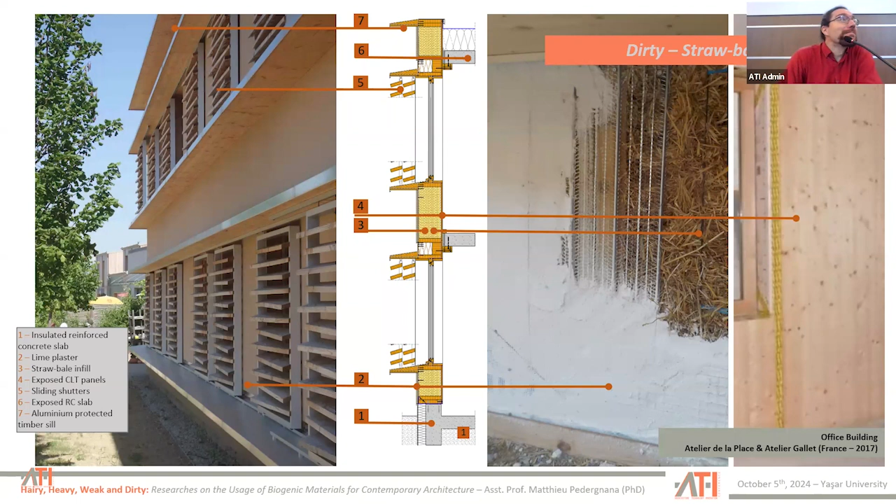You need to think about it. How we face the fact, not what they are, but how we think about it, how we get used to thinking about it. Because those materials that have been used for hundreds, thousands of years, have been forgotten since not a long time actually - not a long time, 70 years maximum, but they are everywhere.

So what do we do, or what do I do? How do I research? First, I don't do it alone.

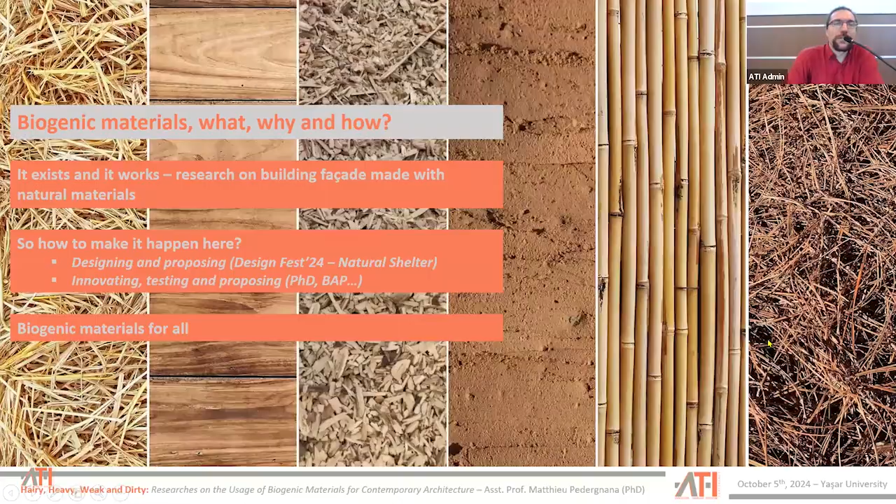So that's what I want to tell - how do we make it happen? By not working alone, and working with students, since I'm at university. This is not my work, this is students' work. This was during the design festival this year.

Yes, at the beginning we introduced - I was again not alone, there were other instructors here, some of them knew about those materials, some of them didn't, but it doesn't matter. We introduced the materials, we introduced the possibility. How did we? By making students take those materials in their hand, get dirty, cut timber, mix mud and water and straw, and understand. And then they were doing it, and they did it really good.

You can see this model down in the exhibition of students' work. You can touch it, it's strong. Yeah, it cracked - of course this was not a research and final material, this was experimental, to experiment possibilities. And that was really good. I will show you after a slide of something we have done during the summer, based on students' experiments during the design festival.

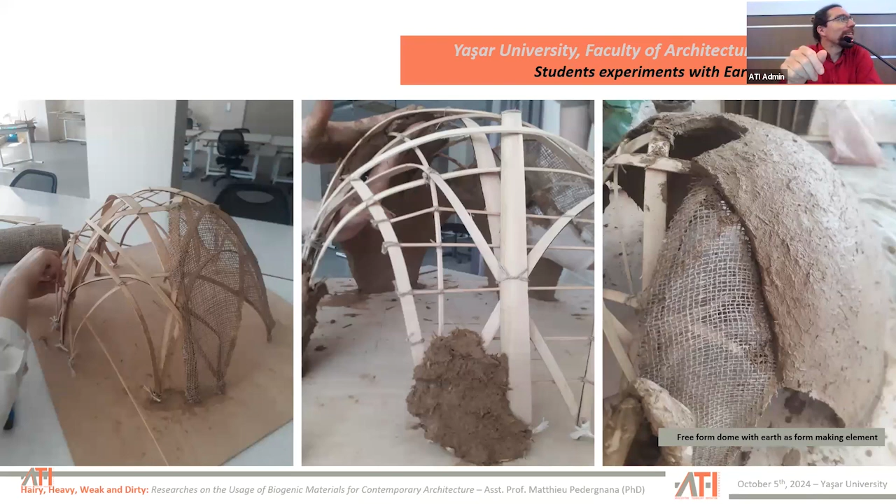Another thing they did during the design fest is this type of wall, rammed earth wall blocks, and how to maintain it by designing some kind of post-tension structure. So you put the block on top of each other - there is no mortar, there is no thing - and then you just compress it. And the students worked on it, they did it by themselves. They didn't invent it, there's nothing to invent, that's a technique that is already known. But they did design it in a way or another, and that's good to think about.

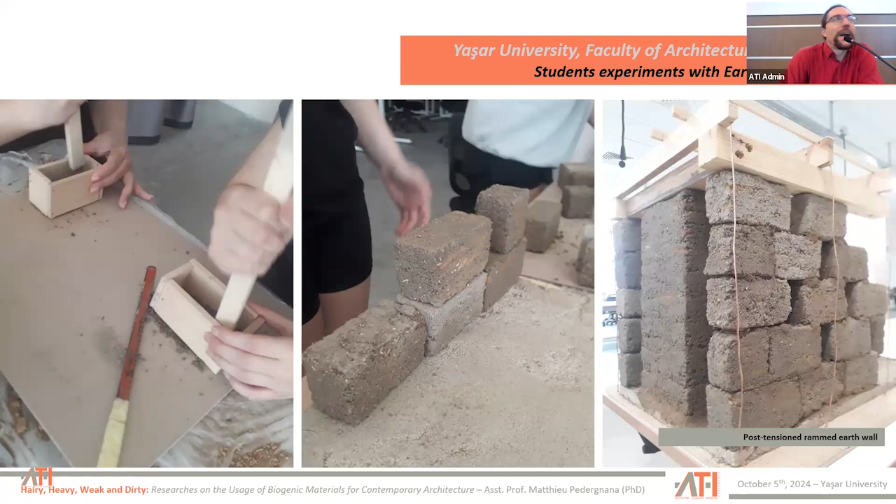Or using different techniques to build. Earth doesn't have to be load-bearing, it can be used as insulation material, just as a cladding material. And there are techniques that exist to build and even design a building, make a vault without any formwork. And it's a traditional technique that can be used, and that's done. They just learned about it, retried it, and made it very well.

There is no formwork to do this vault. Why am I insisting there is no formwork? Because formwork in construction is a high amount of waste, timber waste most of the time, especially special formwork that gives a special shape. If it's straight, you can reuse it; if you have a special shape, you can't. And there are countries where there is no timber. So techniques that prevent the usage of timber are already good to promote.

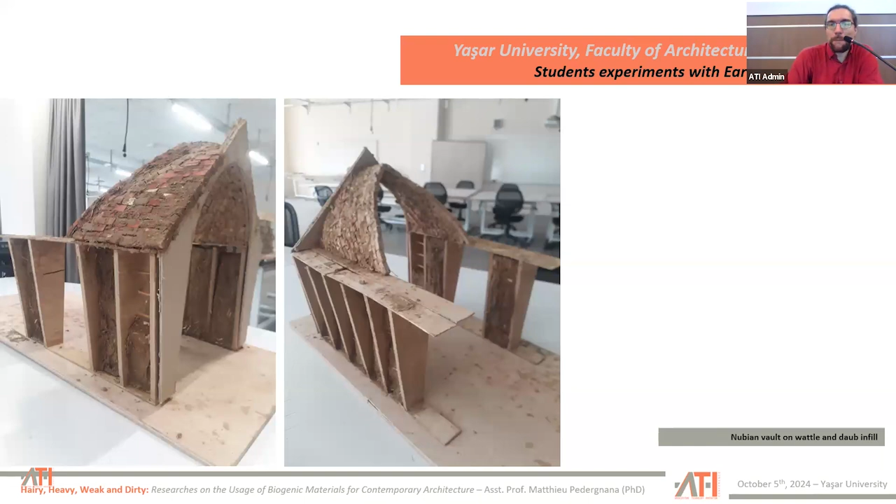This is in front of you. I had a picture, but I thought that you could come and touch it at the end.

This model, again, is done with students, a group of students that came to me after the Kahramanmaraş earthquake asking, Hocam, what can we do? I had an idea, but then we developed it together. That was not my work, that was their work. If it had been other students, it would be different. If it had been built in another place, this model would be different.

The idea is just to use local material as an insulation material, local earth as a binding element between all those fibers, and covering with local earth plaster. It's a shelter, not something supposed to stay for 50 years. It's something supposed to stand for 1, 2, 3, 5 years, let's say. So there is no problem using earthen materials that are weak and not water resistant. On the opposite, it is good to use those materials.

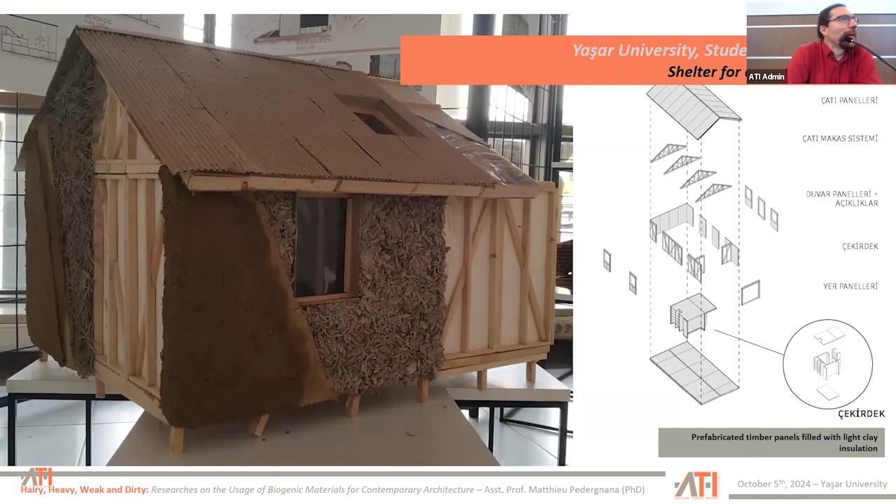After 5 years, let's put everything back to the ground. Then we have really good compost to transform the place where there was a building into a field again, instead of having hundreds of square meters covered with concrete and then steel bungalows, not comfortable because not insulated or not properly insulated, very small and not designed for large families. That's what we were working on.

But it's about using local material, because transporting these kinds of materials over hundreds of kilometers doesn't work. Using local material and local workmanship for people that just don't have a job anymore works better. So that's all about it.

When you start to think about this type of material, it's not only the materials by themselves, which are natural and good for the environment, but if you think local, it means the job, the production system is local too. You have to work with people living there. Nothing is produced hundreds of kilometers away. Everything is produced on the place, with the material on the place.

We were aware that there were no more production facilities, and there would most probably be a shortage of timber, shortage of tools, and so on. So the idea was to prefabricate the panels without the insulation material. All the timber panels were ready, transported. Then the craftsmanship needed didn't require experienced craftsmen or experienced workers, materials that can be found anywhere could be used directly.

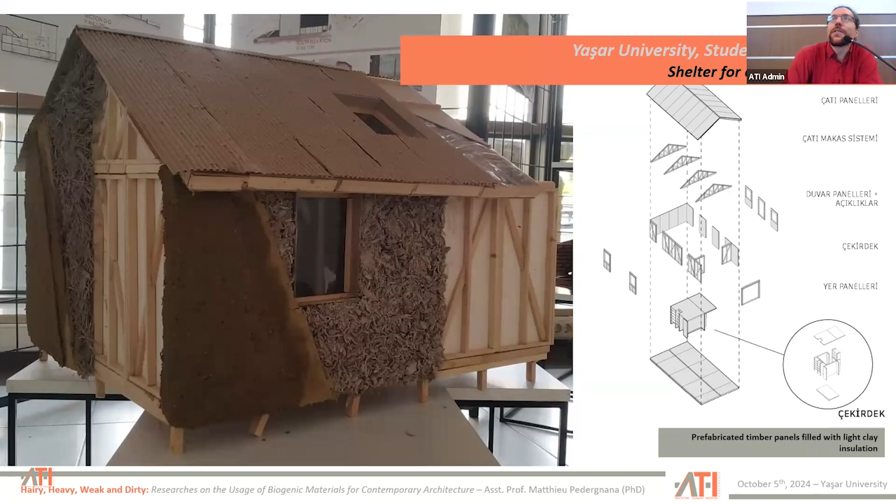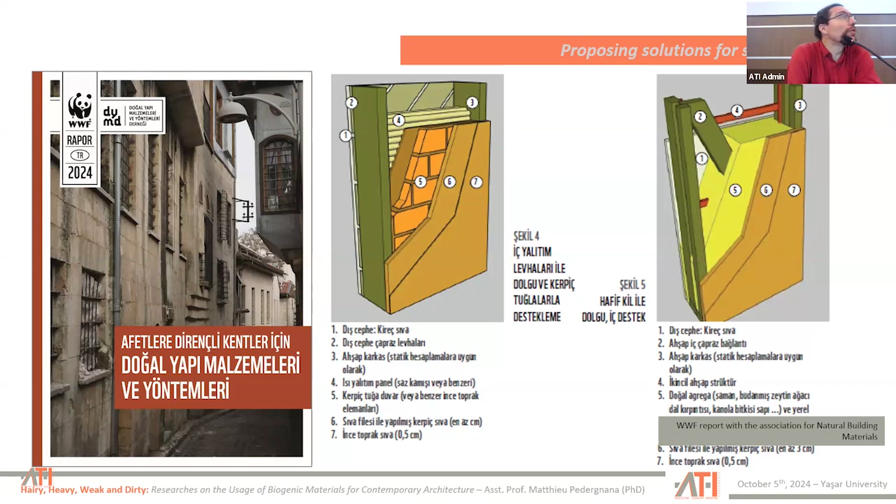And then we continued this work with the association and created a booklet to propose solutions for reconstruction of affected areas by the earthquake or any other natural hazard, by proposing different construction systems. Not out of the blue - this is not new, there is nothing new. This is just trying to learn from what is existing, what has been tested somewhere else, and adapt it to the local material, to the local craft, to the local knowledge.

But for this, we need to test, to research, to find out the properties, especially if it is not to make a shelter that will last 5 years, but to make a building that will last 50 years or more. We need to make sure that those materials have good properties.

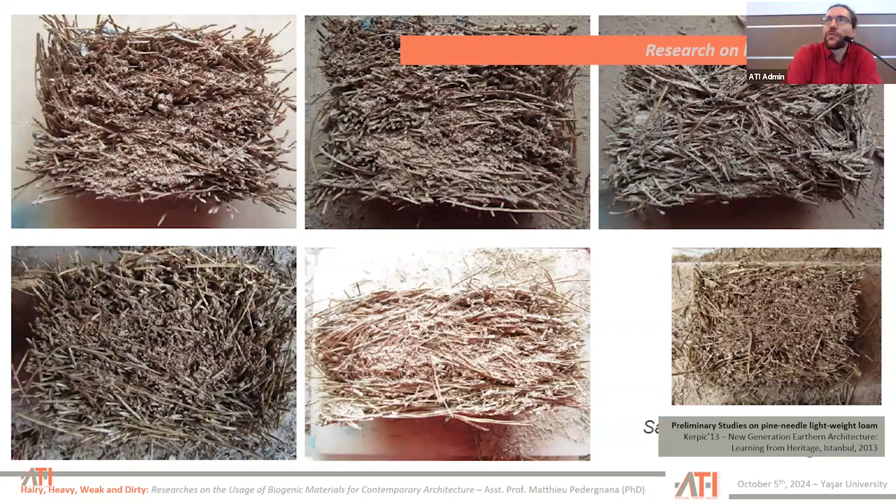And this starts back when I was working with my wife on a master's thesis project. She had a research project on this light clay insulation. For 2012, 2013, we were working on it, and she produced hundreds of samples and tested them for different properties. So here you can see some of the tests that have been done.

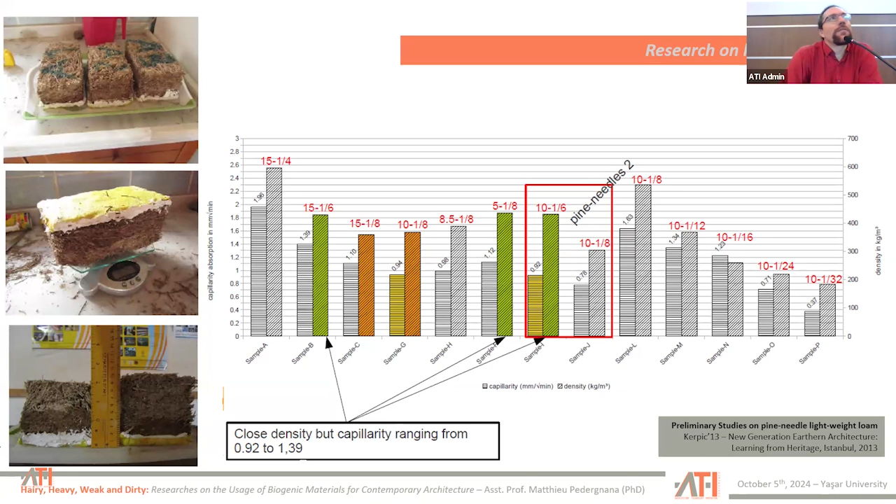She worked with pine needles because that was the local material easily available at ODTÜ. I don't know if you know ODTÜ in Ankara, but it is in the middle of a pine forest, so there are pine needles everywhere. That was just testing how it works, and compared to materials already tested, like straw, the properties were totally similar. So therefore, it meant that pine needles could be used.

Then I was working on my own research, but as soon as I could start again, now I'm coordinating a research project here at the university, again on the same type of material. You can see some of the samples we started to produce with students here. We use 8 different types of fibers to produce different panels that we will test for their insulation properties, their water resistance, their humidity transfer resistance, and so on, to see if they are appropriate for construction.

That needs to be tested because there are so many parameters, and it takes a lot of research that very few in the world work on. There is no lab here in Turkey working on this. There is a lab on reinforced concrete in every other university, but there is no lab in Turkey dealing with natural material at all.

We have to beg a spot in the middle of the concrete industry to be able to work, and their machines and production lines are not adapted to those materials. So the research is not efficient, because everything is turned in one direction, and we need to rethink how to do it.

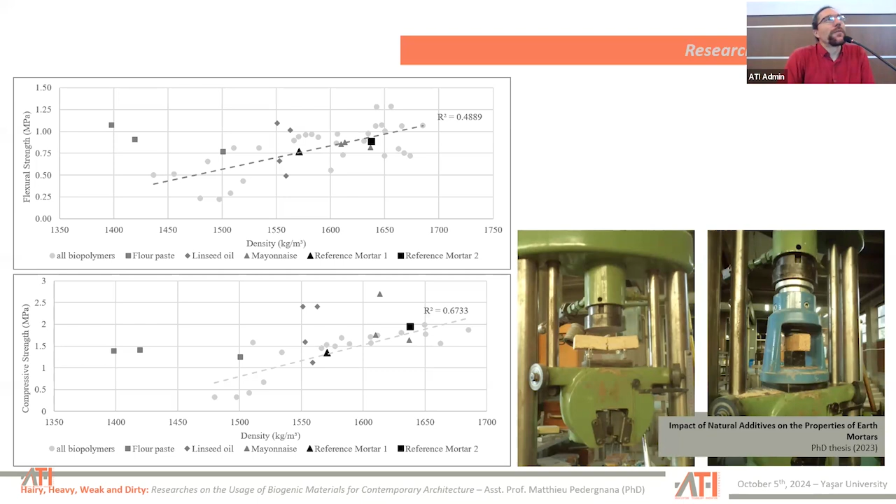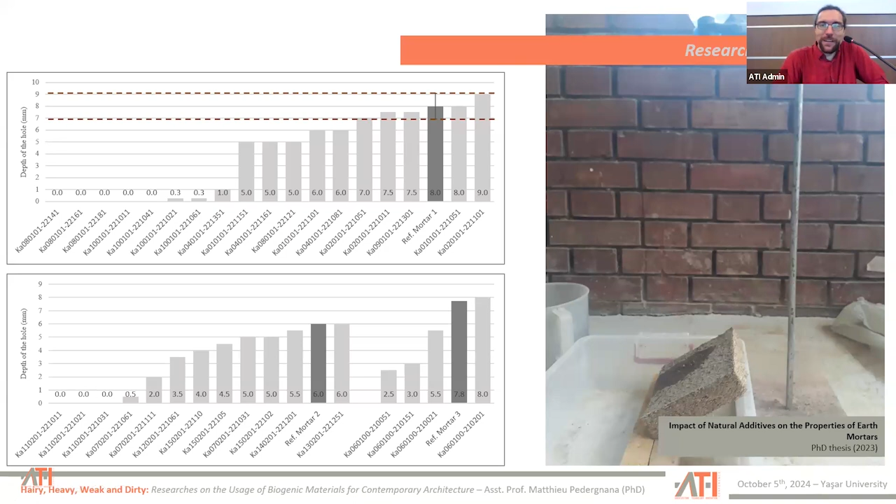So I started to work on it, doing mechanical resistance tests, water resistance tests, and many other things—you see the numbers here, these are the sample numbers. You can imagine how many combinations I tried. This is the conclusion of my PhD.

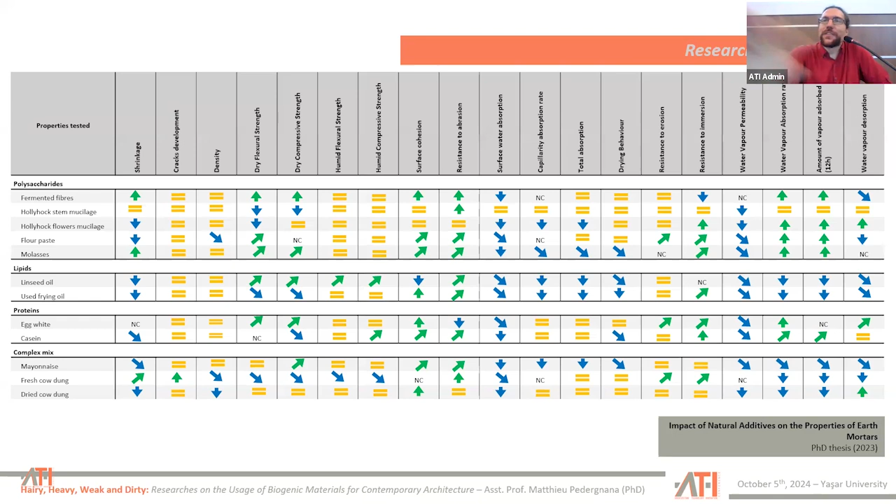But this is only the conclusion on the biopolymer additives that have been put in. There's nothing about the amount of fibers, the type of fibers, the amount of sand, the type of sand, the type of clay. It's just the biopolymers and the different tests, showing good results. But whatever you do, at least among those I tested, there's no biopolymer that is a complete solution.

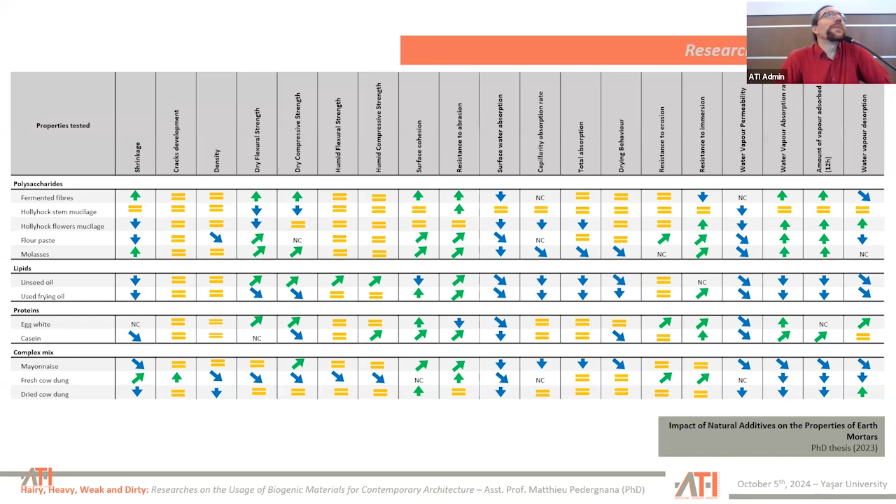It depends what you want to do with your plaster—if you want it more water resistant, more strength, or more humidity transfer and so on. It depends. So you need to know what you want to use it for.

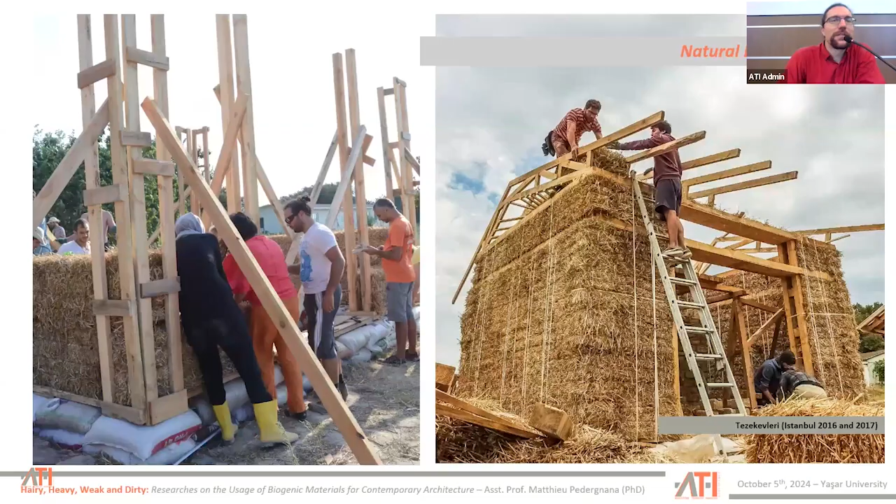So then, yes, this is the research part. And as I showed at the beginning, it's good to introduce these materials to everyone, to experiment and try, and then to apply it. So these are workshops, real workshops with students, some architects, and some people who wanted to build their own houses—these are experiments too.

This building is a straw bale load-bearing house of 20 square meters built in 10 days. This is its state after 10 days, built only by unexperienced workers—people who didn't even know how to cut a piece of timber. But they did everything from the foundation to the roof in 10 days at the workshop. Straw bale was fast.

We did the same with this type of material. It was a bit slower, but still, they did the entire frame.

What I want to show through this is that we need testing. We made a lot of mistakes, but those mistakes were used to improve the techniques, to avoid repeating them, and especially to introduce people to these different materials and how they work. Also, everyone could be educated to do this—if people with no education in manual labor can do this kind of work, any worker in the building industry could shift their skills to make it much faster, much more efficient, and better quality.

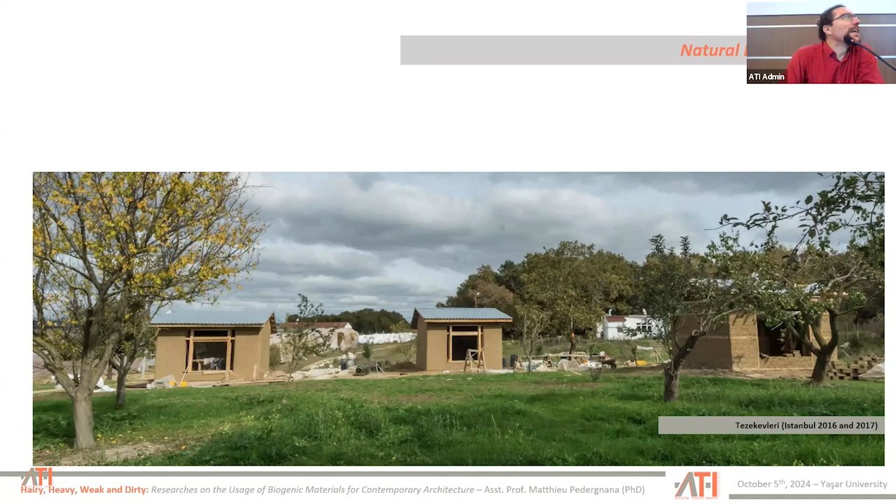That was the state of these 3 small houses after one summer of workshop with students and volunteers coming to help. Unfortunately, our funding finished, so the third one you can see hidden here has never been finished. The other two were finished and used for people to live in, one finished the year after. That's how it is to work with workshop and experiment—it doesn't always lead to what we want.

Working with students, introducing them to different and alternative techniques. During 2 years we've been doing workshops organized by ISTEC, the architecture department, inviting students from all over Turkey to build with us. A lot of different things were done and tested, like building an oven out of earth because they wanted a summer kitchen on the place.

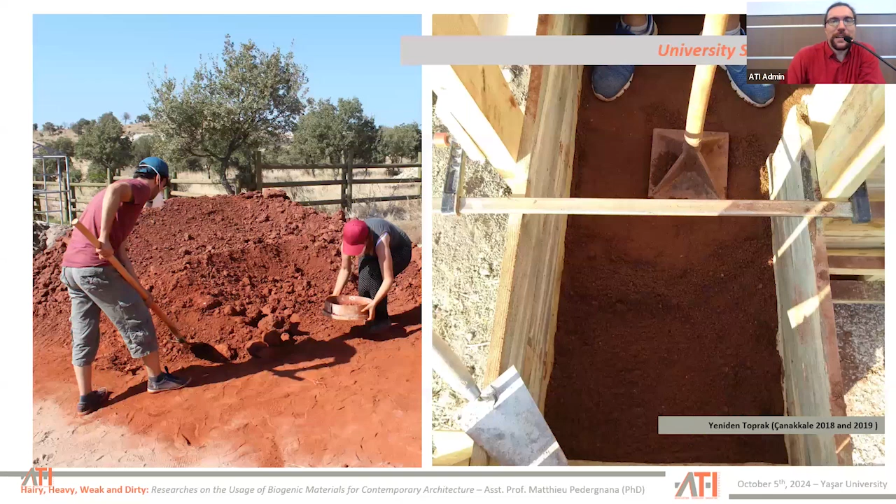So we started with an oven out of earth—different techniques. Then students made a rammed earth wall. What was important is not the final part of the process, it's these two pictures: students doing all the work, meaning we had a pile of earth at the beginning that needed to be tested to find the right combination between earth and sand.

It needed to be sieved and broken into dust so it can be used properly. They did it, then had to build a formwork, and then build the wall. Students did all this during the workshop, so they understood that a finished wall isn't just about drawing it—there's a process behind it, a process of building. Of course, I don't have a picture of the finished wall, but half of it collapsed at the end.

No problem, that's part of the experiment. That's the reason why we do workshops—it doesn't have to be finished and perfect at the end. That's not the point. The point is the process behind it, and learning from the mistakes, learning from what was wrong.

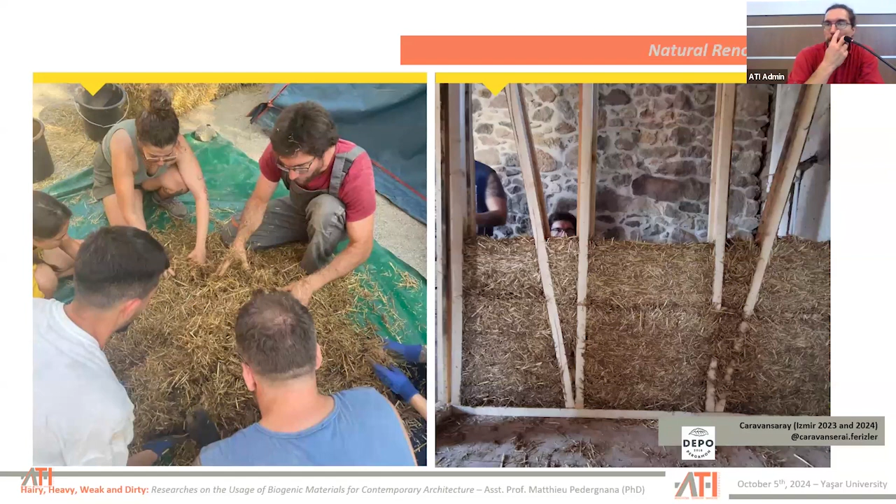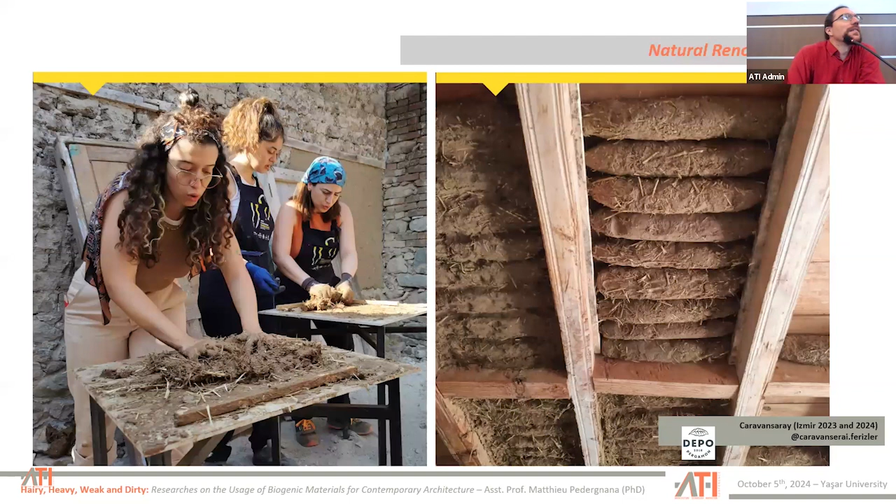Another workshop, this time in Bergama. Over there we worked on renovation of an existing building, applying the same type of techniques. Again, architecture students staying for months, learning and building everything by themselves, being introduced to materials and new techniques that have never been tried here, at least in Turkey, to find other solutions.

So this is making ceilings out of earth and fibers. Why? Because the ceiling was made only with a board, so to create heat and sound insulation in between, we needed to find a technique. This was a technique available, and this was a test—testing, seeing what works, how to understand it.

I'm thanking the students who worked on the design festival last year, because thanks to their work, during the workshop we could do this, using the same techniques of bending reeds, attaching them, and filling with earth in between to create a vault. Why do this? Just to test, just to see if it works. Maybe next year it won't be here anymore because of too much rain, too much snow, too heavy—whatever, doesn't matter.

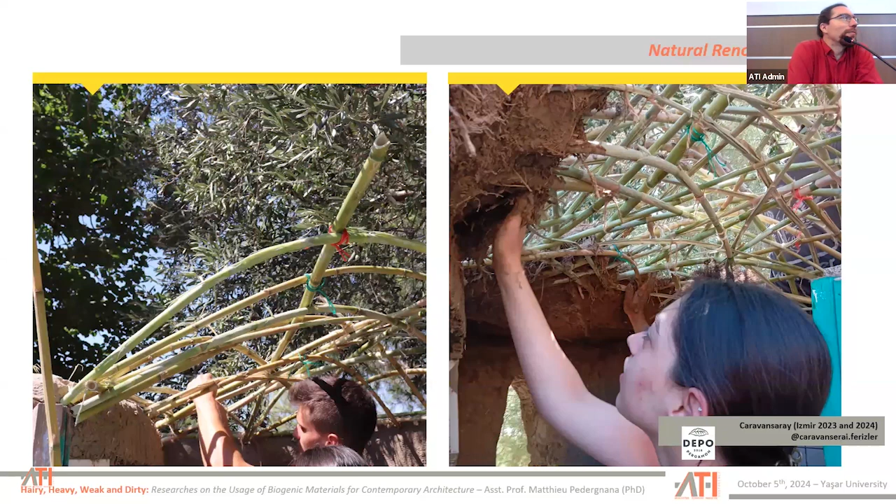No one is living in it, no one is below there. If it collapses, it collapses. But the point is the process—trying to learn, trying to understand, trying to see how it can happen. This is not engineering work, there's no engineering calculation behind it. There's just testing and understanding.

This can also be done not only to test, but to create a real scale building—again through workshop, again with volunteers. This is one house that's been done exactly using this type of technique, these materials for the walls, the roof, the floor, as you can see here. But again, it's hairy, it's dirty—you can see this guy mixing, covered with mud.

Yeah, and what? It's better to be covered with mud than with cement. Cement burns, lime burns. Clay, just wash it out with water. Anyway, how many of you make face masks with clay? That's used for beauty, for aesthetics. So why not? Why would it be dirty?

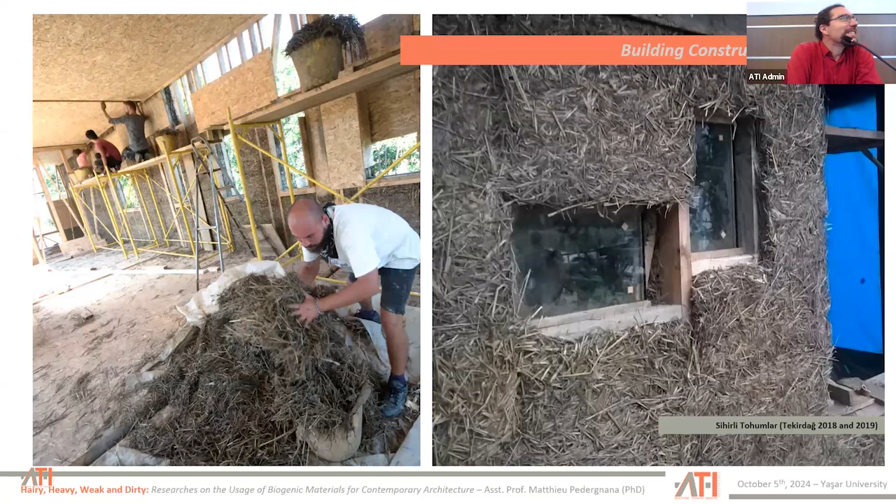So this is the house, and this is what has been done at the end by unskilled workers, by students volunteering, learning, and making workshops. This is not only testing—this is a house that has been standing since it was finished in 2019, so at least 5 years. People are really happy inside.

So this is just a small introduction on what can be done with this type of material, and what is needed, and how we need to continue mixing education, research, and applied work to make sure people understand its necessity. So now I don't know if you have any questions, but I'm ready to hear from you.

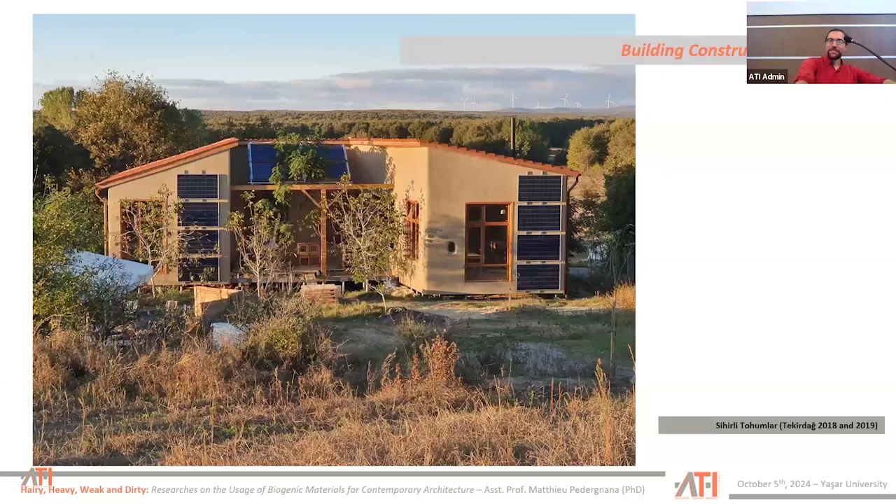At one point, probably you had somehow experienced the same issues with them. So what would be the strategy? What would be the tactics to be able to win this war? Because it's a very, very difficult war. I mean, I know there is no easy answer, but I just need to hear your thoughts on it.

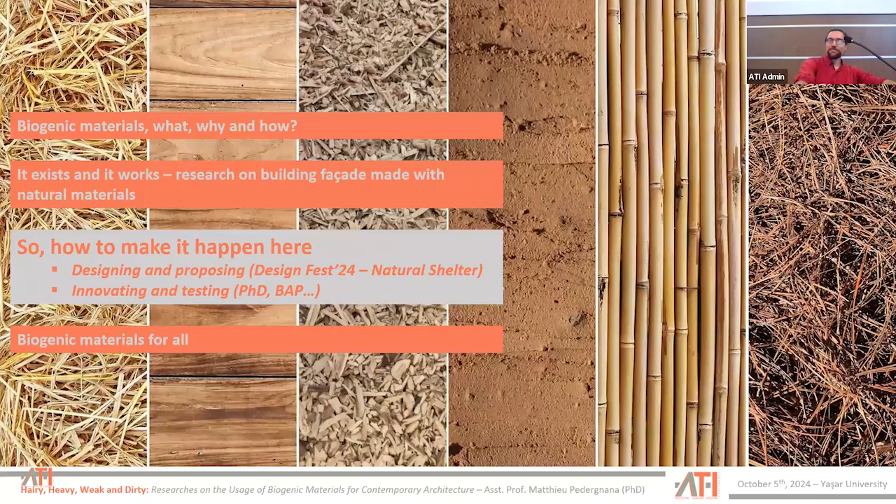No, it's totally true, in a way there is this, but I'm really not afraid for the capitalistic system. They will go on, they will embrace it, and they will make money out of it. They already do. This hemcrete building here, for example, or all the examples I've given, yes, it seems alternative here in this context in Turkey, but when you go to Europe there are hundreds of examples like this built by big companies, big architects, and so on. Companies like Lafarge or whatever already produce hemcrete blocks and sell hemcrete blocks. It's not a problem for them at all. They don't mind, they will just change their system.

So you think even in Turkey, those big companies can adapt themselves to this new way of doing things if they see that there's an opportunity? Yes. And the opportunity, that's what I want to show. The opportunity is for us to bring.

If there is no one that knows how to do it and no demand, they will not embrace it, and the scale will stay the small scale of the building I have shown at the end, what most of the architects and builders working on are doing right now. But if there are more people ready for it, more people showing that it may happen... unfortunately, I'm not afraid for the capitalistic system, it will always continue, at least until a point.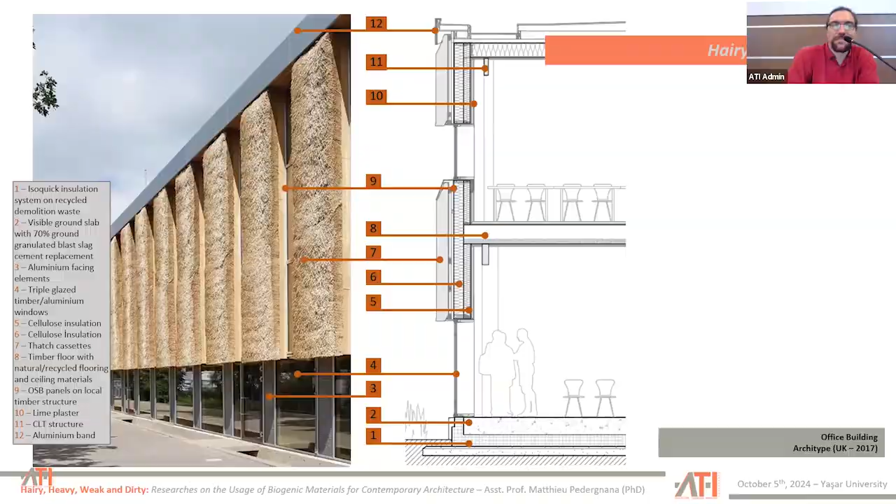So I will try to continue from the concept of industrialization. I think the first question was about that, industrialization of these emerging materials, but they are not actually new materials. So have you considered working on panels instead of blocks?

Like you mentioned with the plaster panels, we did some work in Belgium using wood fiber panels. So it's actually the same concept. But do you think prefabrication would work with this? Together with, I think, self-building in Turkey should be remembered and retaught in our country, that's for sure. But we also need big companies to prefabricate. Do you think that would work for your studies, for example?

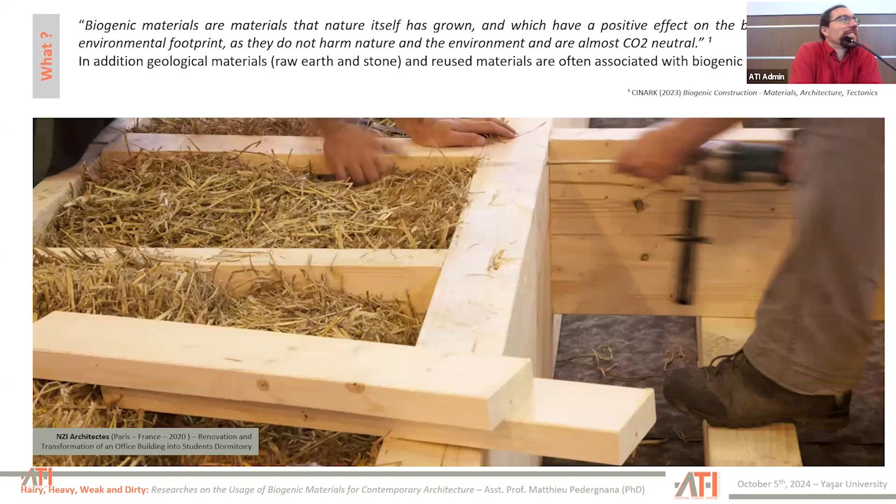100% sure. And I will ask another question to everyone, because what we did in Ghent was to build up a circular bio-based building and ask locals if they really like to live in such a building. And then I would like to ask the students if they would prefer staying in this house that you see now in front of Matthieu, or would you prefer the regular ones?

But then do you think prefabrication would work? Yes, it is. Are you working on it? No, right now I am not. I'm working on the material side yet. But prefabrication is not much more complicated. It's just, I mean, not this one, but some of them are the same.

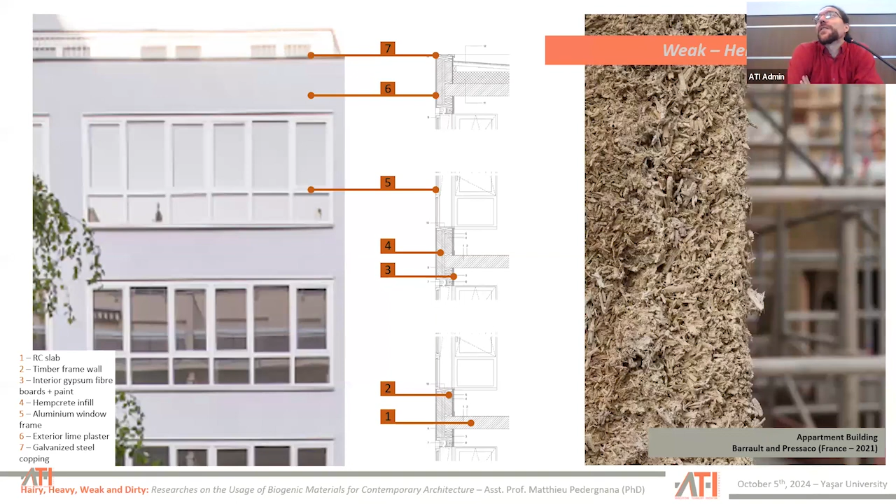Thank you. I feel like now I'm going to get the flag and revolutionize, say it against the construction industry. But it feels like that, and I think it's not only about developing ideas for industrialization or multiplying or developing a huge building. I think it's about life - it's about needing less, producing less, consuming less.

Definitely. So I think we don't need to improve that idea for mass production, because if you want to live with less, if you want to make it for yourself or for your neighbors or for people just for good, then it's a really good way.

By the way, cement industries, for 10 years they've been trying to replace cement with other materials like fly ash and other binding materials. So capitalism is on the way and they're really far along. So they're going to find a way to survive for sure.